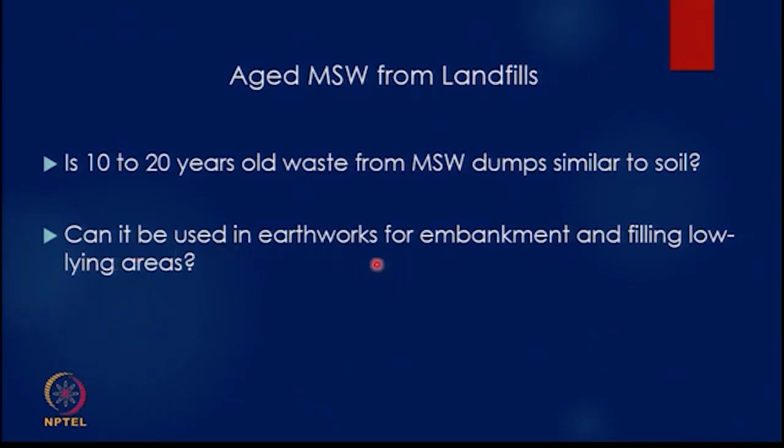So let's look at aged municipal solid waste. The question is: is 10 to 20 year old waste from MSW dumps similar to soil? Can it be used for earthworks in embankments, filling low-lying areas, and as backfill?

So does aged municipal solid waste have significant non-inert material? The material we should have should be physically and chemically stable. So is the organic content high? If it is high, we have a problem. The question is, what is high? Is 1% high, is 10% high, or is 50% high?

Does it have bad smell? Does it give out colored water? Does it leach out colored water? And does it leach out heavy metals or any other deleterious materials like sulfates, chlorides, and other salts?

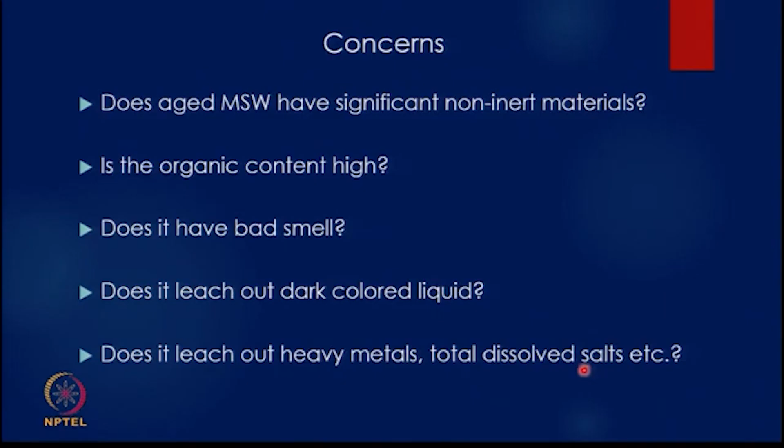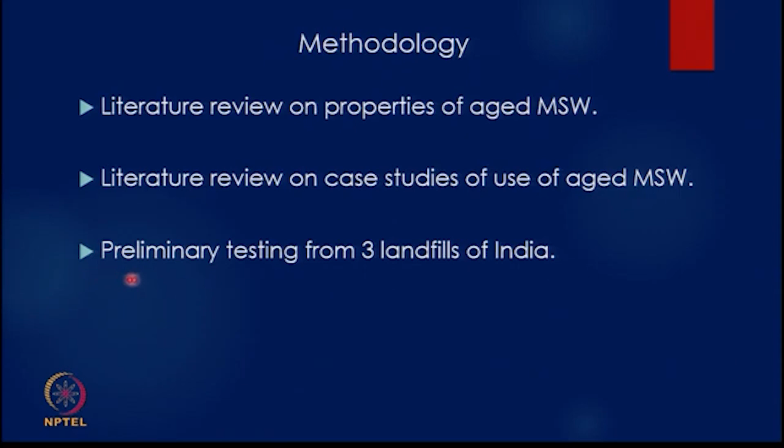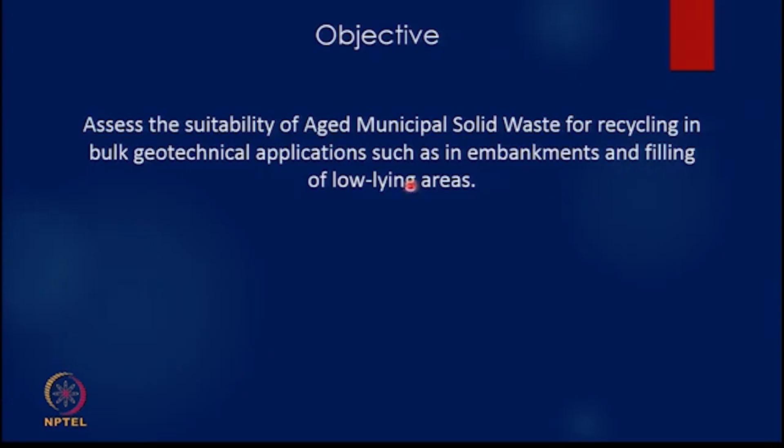So the methodology is we look at the literature, look at the case studies of use of aged municipal solid waste, and also look at the data emerging from India. The objective is to see whether bulk geotechnical applications of aged municipal solid waste in embankments and filling of low-lying areas is feasible.

If you look at the literature, I am talking about some data from California, some from Korea, and three from India. Typically the age of the waste: 60 years, 25 years, 4 to 12 years, 15 years, 15 years. Bulk of it, the waste is soil sized, please understand.

So passing 2mm sieve, about 40%, passing 2mm sieve, about 60 to 70%. Passing 8mm sieve, 60 to 70%. So gravel downwards or coarse sand downwards, 60% of the material, not reported. Passing 75 micron sieve is about 30%. So it means the others are more.

Here some liquid limit and plastic limit has been reported by California, but not reported in the others. Maximum dry density, good high range, indicating more soil-like behavior, a little lower range. OMC shows wide variations. So the question is, how much biodegradable content?

60 years: 6 to 12. 6 to 12, 14, 9 to 20, 9 to 16. So what was 35 to 75 has come to about 10%. That's all I can say. Maybe 15, sometimes as low as 5%.

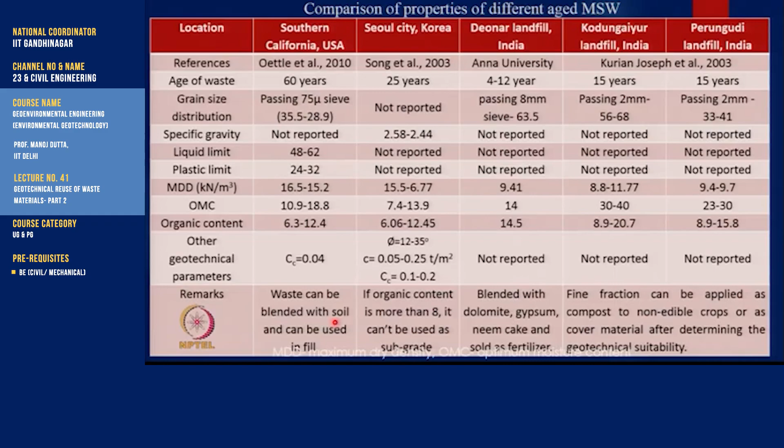You mix soil with 6% organic content, 100 grams, and take another 100 grams of soil with 0% organic content, mix the two, and the organic content will fall to 3%, and you can say I can use this soil. So that's what they suggested. And they were very clear that if you are having organic content more than 8%, the soil behaves very badly. And of course, this is for other materials.

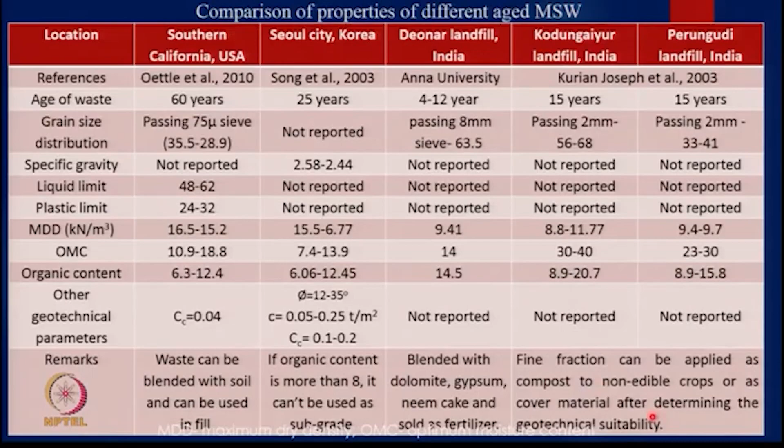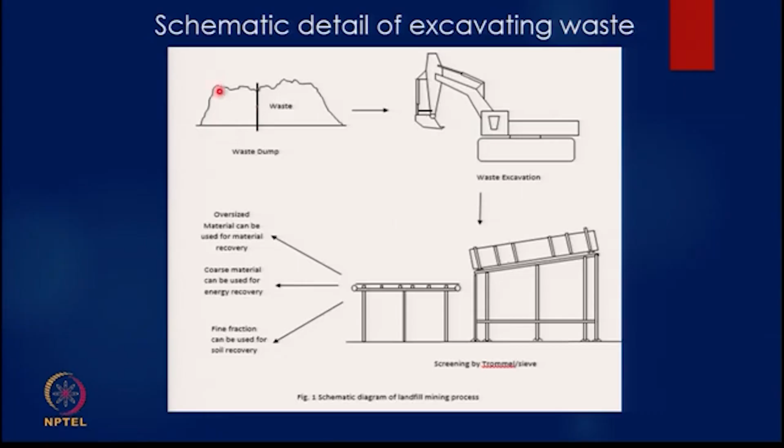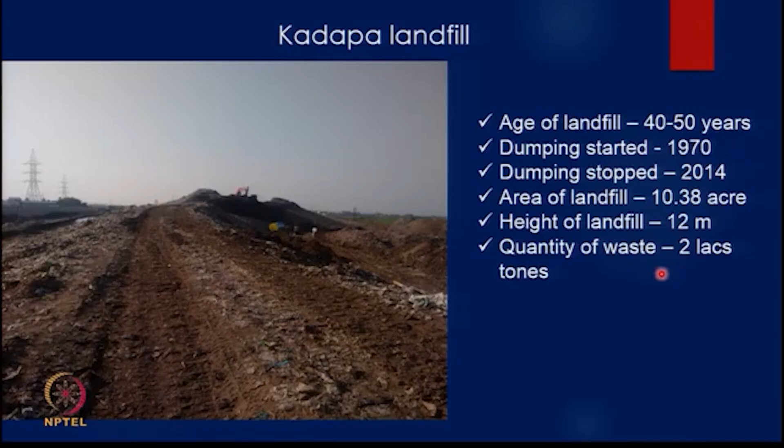Some of the work done by our students here, including Mohit and Garima, is happening in India. They've taken material from Kadapa landfill in Andhra Pradesh, waste as old as 40 to 50 years, the oldest waste, which operated from 1970 to 2014. From Hyderabad landfill, started in 2001, so 15 to 17 years old. Remember, 15 to 17 year old waste will be at the dead center.

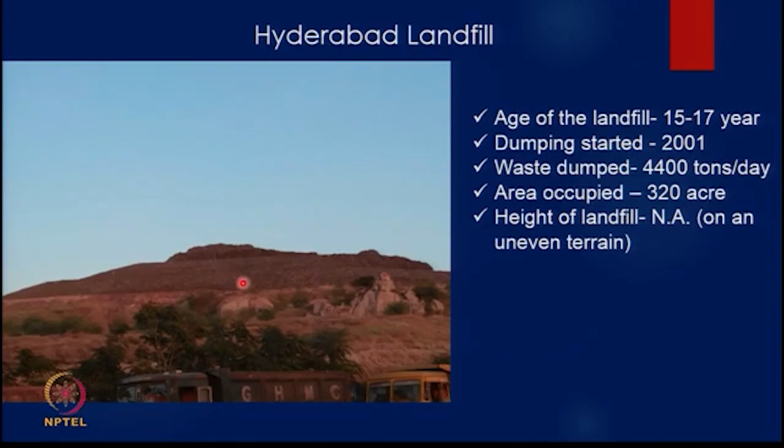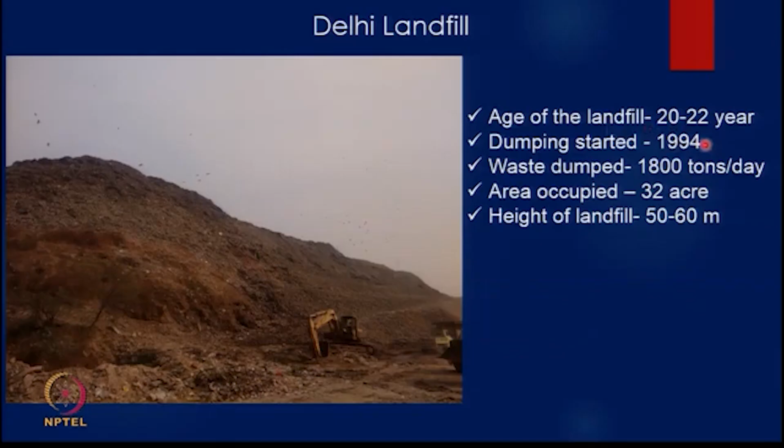Getting to that waste and taking it out is not that simple. The landfill keeps on growing, so the oldest waste is in the center. Then there's a Delhi landfill, started in 1994, with age about 20 to 22 years.

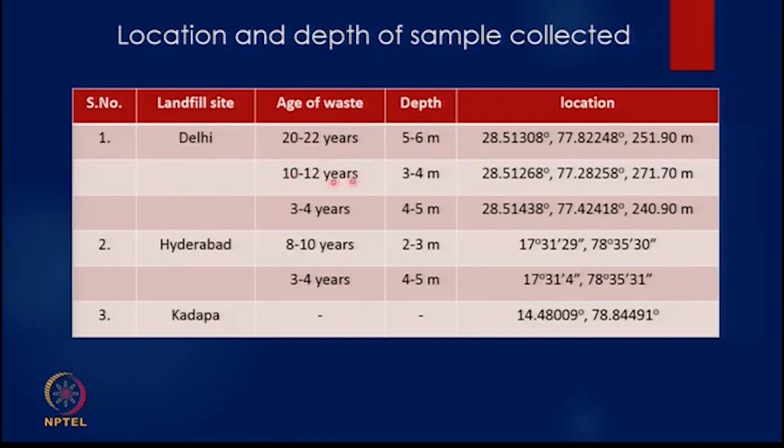So here's the kind of activity one does. Kadapa is a good site because it's a World Bank headed project doing landfill mining. Since they dug up everything and mined it, you weren't sure exactly what the age of the waste was because everything is now mixed. But in Hyderabad and Delhi, one could get samples 8 to 10 years old and 20 to 22 years old. So here's the Kadapa operation.

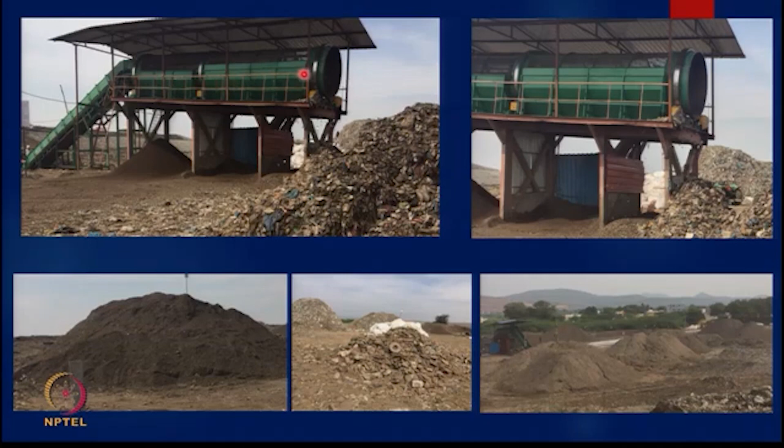Once it goes up the screen, these are the rotating screens, and this is the material that will fall out. This looks like soil, right? Some will fall out here, some will fall out here, and some will come out completely - that's the oversize fraction. You can see the oversize fraction falling here. This is soil, this is more sand and gravel-like, and this is the oversize fraction - plastics, cloth, and so on. So that's the soil-like material, that's the oversize fraction, and that's the landfill mining operation.

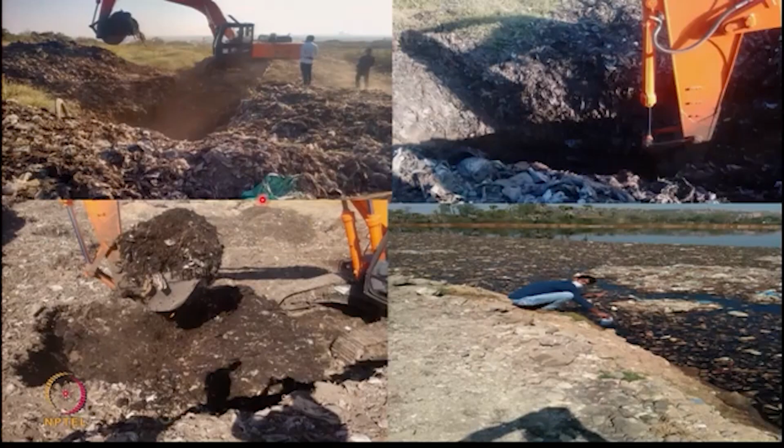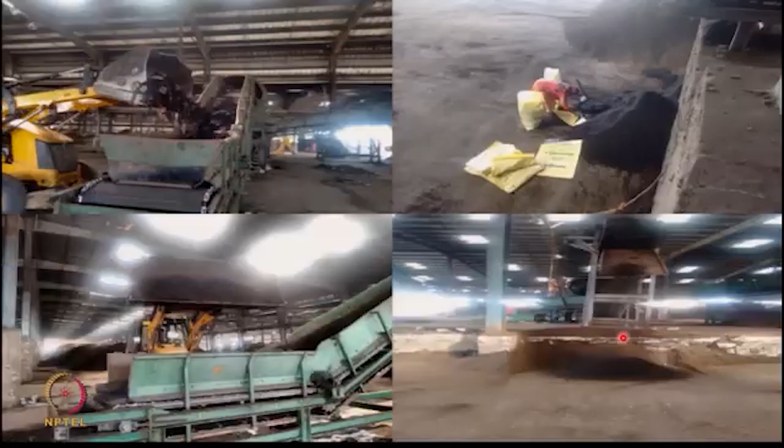This is what was done at Hyderabad. Here you can see a young man digging out the old waste. This is what it looks like, taking leachate samples, then coming into the trommel. This is the excavator bringing it, dumping it. That's the type of soil - in one location you get dark soil, in another case fresh brown soil.

So which has got more organic content - the light colored soil or the darker soil? The darker soil. Good. And this is at Delhi landfill, excavator being used.

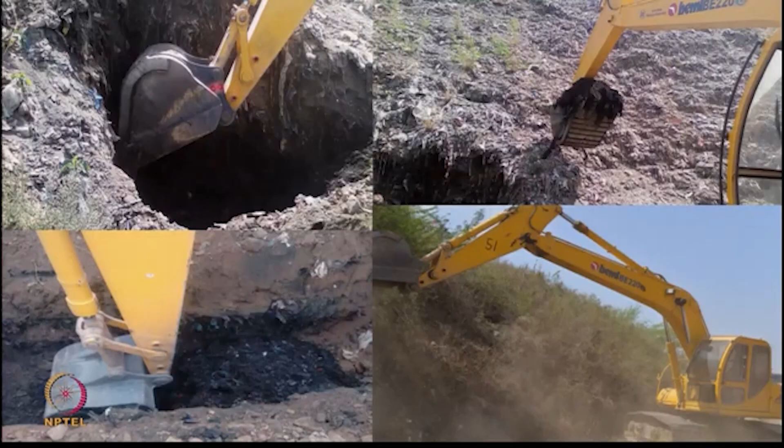You can see this dark material, this is another material. Here there were no trommels, so these sieves have been made specially. Soil is put on it, and this is something, and this is something.

Mohit was able to retrace the dates from newspaper cuttings still found in the waste, and he could prove that this was from 1998 - so that's almost 20 years ago.

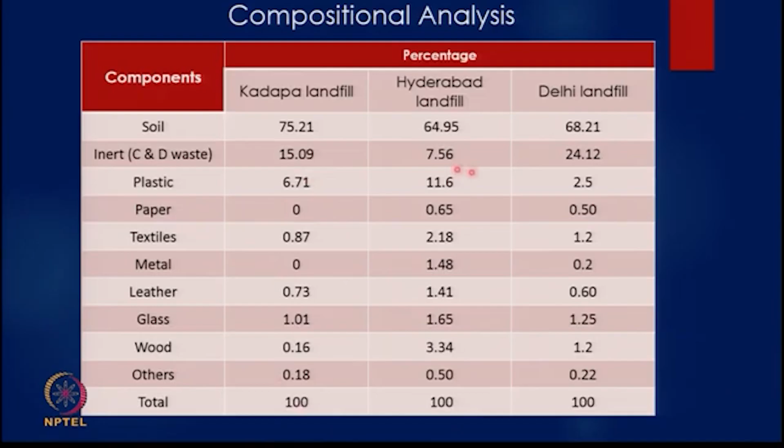When you look at the material in terms of its compositional individual components, most of the material is soil-size range. This is the oversized range - the large construction material, which when you say inert, you mean large sized material. But you have plastics here in Kadapa, and there are others - a little bit of textiles, cloth rags, leather, wood - all these are burnable. These are energy recovery materials, please remember.

When I do grain size distribution, I am interested in how much is soil-like material. Soil-like means gravel, sand, silt, clay. Sand range is less than 4.75 mm and gravel is 4.75 to 20 mm, probably fine gravel, but there is also coarse gravel. So the material which is less than 4 is 20%, 20%, 16%. The material which is 8 to 4, if you go up to 30, then it's 33 plus 12 plus 22. So about 60% material is soil-like.

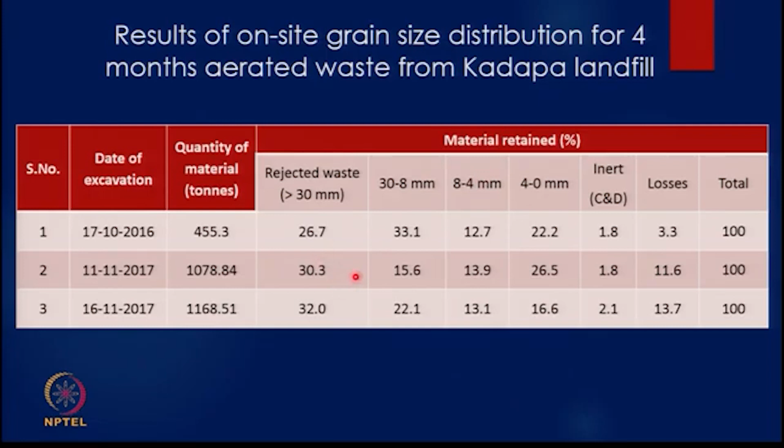This is from Kadapa, 60% material is soil-like. From Delhi also, if I go 35 down, 14, 35 to 16, 16 to 4, 4 to 0 - 14 plus 20, 34 plus 33, 67, 10, 30, 70. So 60 to 70% material is in the soil sized range.

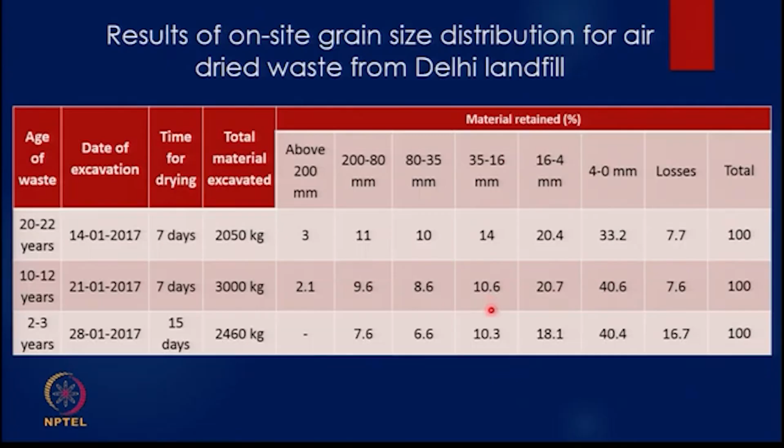Then let's look at organic content, because that's something which is important to us. From 20-year-old Delhi landfill, 12-year-old Delhi landfill, we are having 6 to 10%. But this is only the very fine range, please see. The wood fragments and other material will not go in. The moment you go to a higher range, it goes up. Hyderabad landfill is 11 to 12% in the very fine range, but if you go to the higher range, 20%. Kadapa landfill is 6 to 7%.

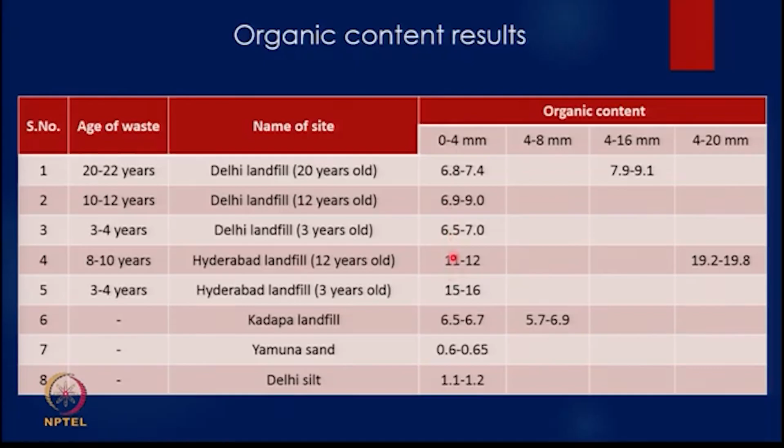But if I take Yamuna sand, 0.6, if I take Delhi silt, 1. They are less than 3%, and these are all above 3%. And still the full test has to be done, because this matrix has only been done on this size. When you fill these up, maybe the values will go up, because this is only 20% of the material. If you are only going to take out 20% of the material, you are not going to be able to use much of the material.

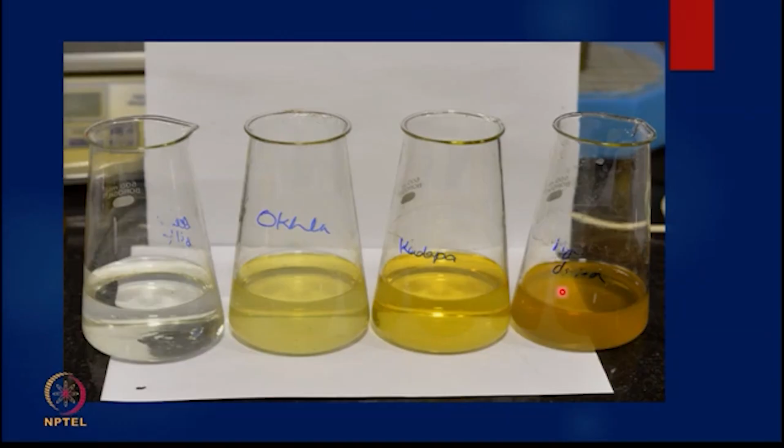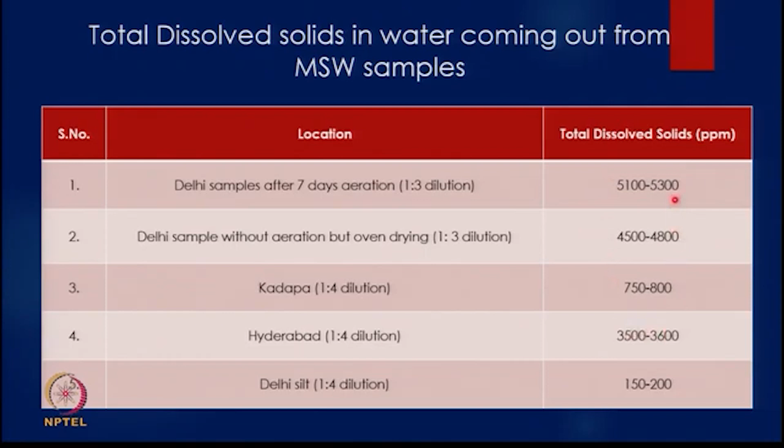But when you mix water with them, because you saw black leachate at the site, you said let's mix water with the soil, so we get these kind of suspensions. And when you decant it through filter paper - this is silt, this is Delhi, this is Kadapa, this is Hyderabad - so there is some color which is coming out. The leachate that you analyze, they don't have very high heavy metals, maybe 1 or 2 exceeding the limits, but there are a lot of total dissolved salts. So we just mixed 1:3 dilution or 1:4 dilution. This is just initial work, and we are getting very high values of total dissolved solids. Please see, Delhi silt is 150 to 200. In drinking water, 500 is acceptable, desirable, but here these are all in thousands. So that's a problem.

And does it smell bad? When you excavate, it smells very bad. But within a month, there is very little odor. After aeration for a month, it's like soil, you feel it's like soil. High odor when you excavate it.

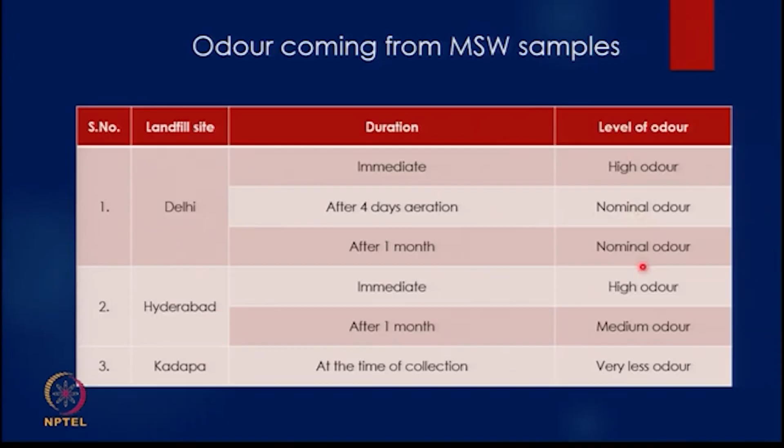And if you look at the permissible organic contents in the various literature, up to 5% is allowed. Maybe sometimes 7% is also mentioned, but 5% is allowed.

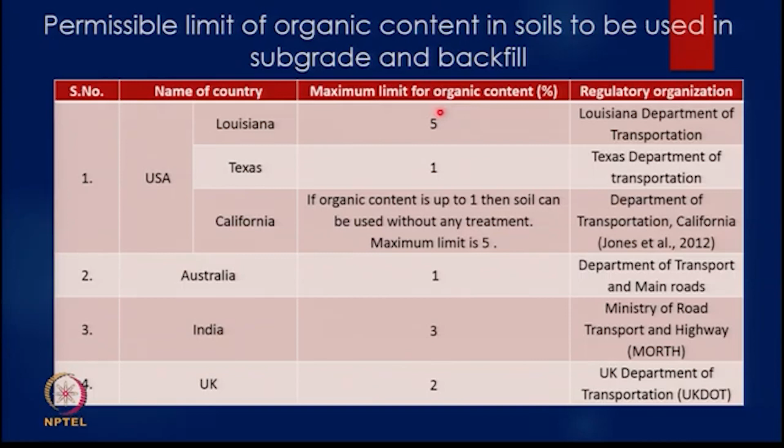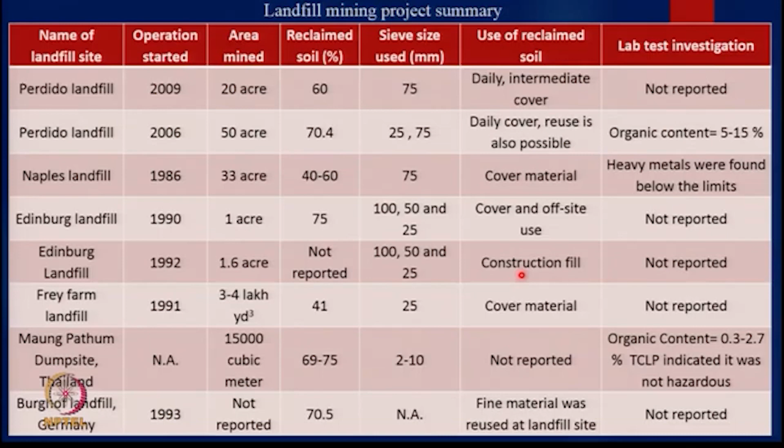Then you look at case studies of all these landfill mining projects, how much of the soil has been used as an earth fill - this is all these landfills abroad. You are using about 60 to 70% soil, but all of them are reusing it at the landfill as intermediate cover, daily cover, intermediate cover, daily cover, cover. Nobody is using it as an earth fill, except one place it is written, but the details are not mentioned. So even today, because of the organic content and associated salts, there is a slight thinking that it cannot be used. But one thing is clear, maybe it requires some pre-treatment. And if I can find a cost-effective way of pre-treatment, then I can use it in the earthworks.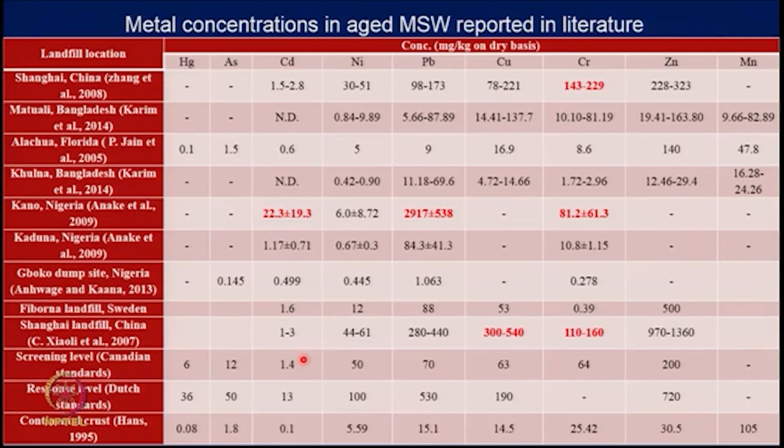If you look at this table where we have determined all these heavy metals, we find that in bulk of the landfills chromium is high. In some of the landfills copper is at an elevated level, and in one of the landfills cadmium is at an elevated level.

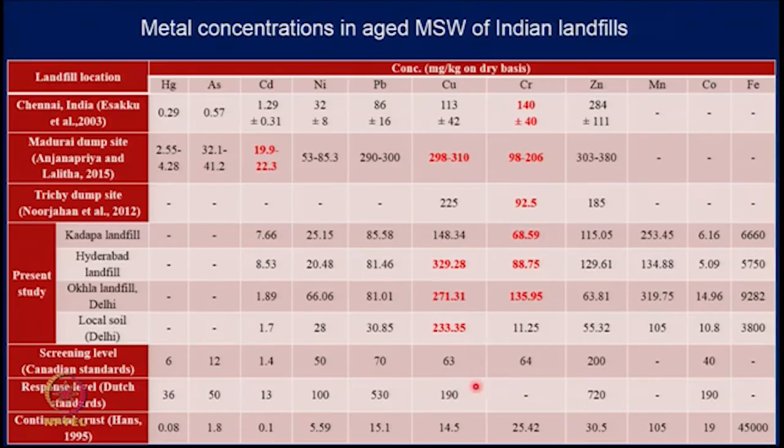So the issue is that in aged municipal solid waste, sometimes the heavy metals can be higher.

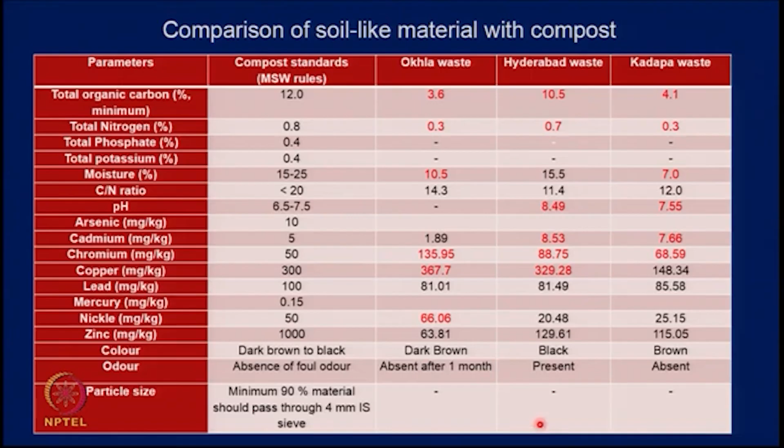So in this way, what we see is that in some landfills the heavy metals may be within limits, but in other landfills heavy metals may be at an elevated level.

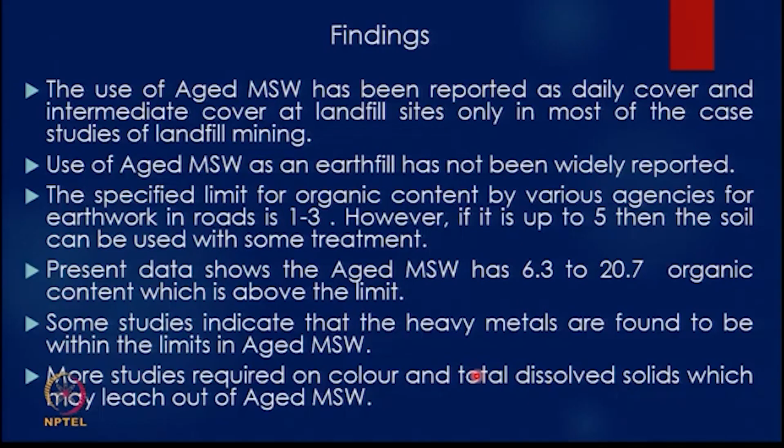But I do expect over the next 5 years that technologies will now be there where we can start reusing it. We do some aeration, we do some burning, we do some pre-treatment to make it workable.

Any thoughts on your mind before we go forward? Because the next one is incinerated ash.

So as far as aged municipal solid waste is concerned, one thing that does come out is it degrades very rapidly. In 10 years that 35-40% is down to 10-12%. And whether that limit of 5 can be taken to 10, the jury is still out.

But remember that if you want to use more and more of the waste, you have to take the higher fractions. So as you go to coarser fractions, the organic content seems to be going up. So if you want to use 70%, then you have to use 30 mm down.

And the test for doing organic content is a muffle furnace test, where the crucible in which you put the sample is very small. So if you want to take a lot of soil, then you have to have a big muffle furnace which is required for a representative organic content.

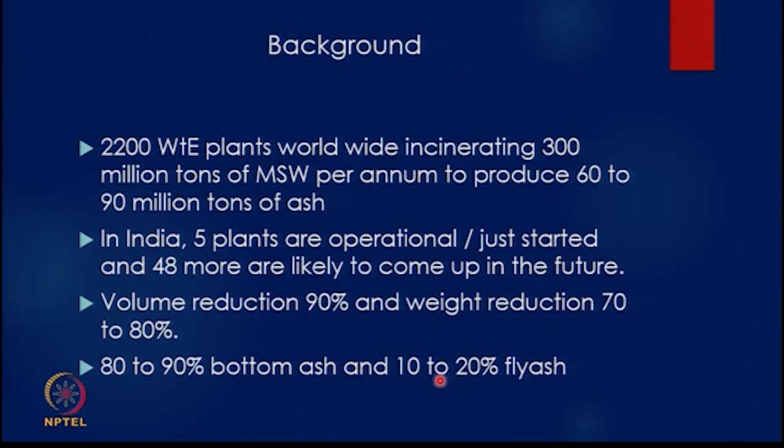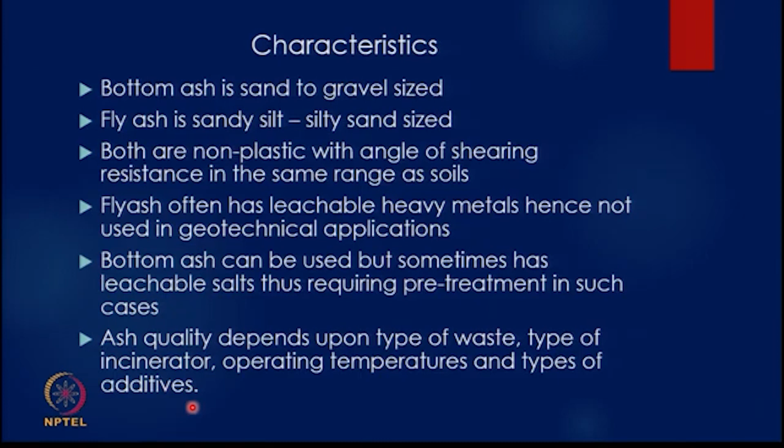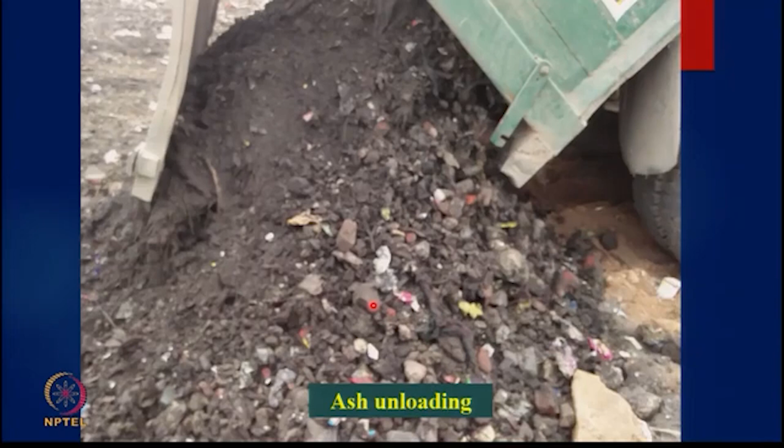So if you look at what's happening in Delhi, ash is coming in the form of trucks. We are not sure whether it is mixed or unmixed, but no separate truck comes for fly ash and bottom ash, so maybe it's mixed. Maybe 8 trucks will be of bottom ash and 2 will be of fly ash. The ash doesn't look like coal ash, it's dark, not like the light grey fly ash that you saw, and you can see large sized particles because it's a mass burn plant.

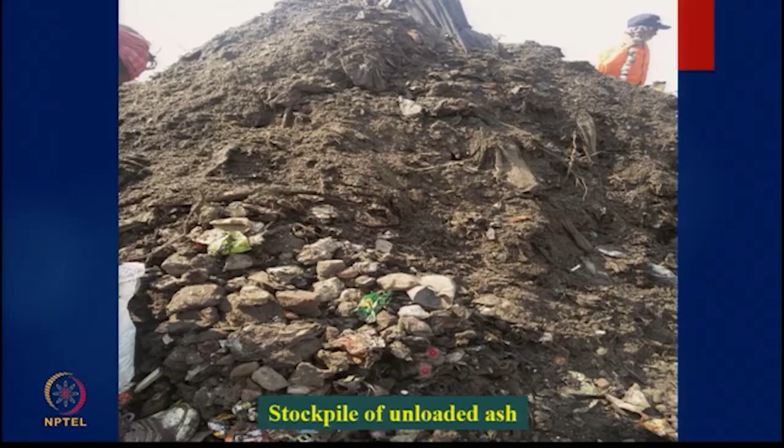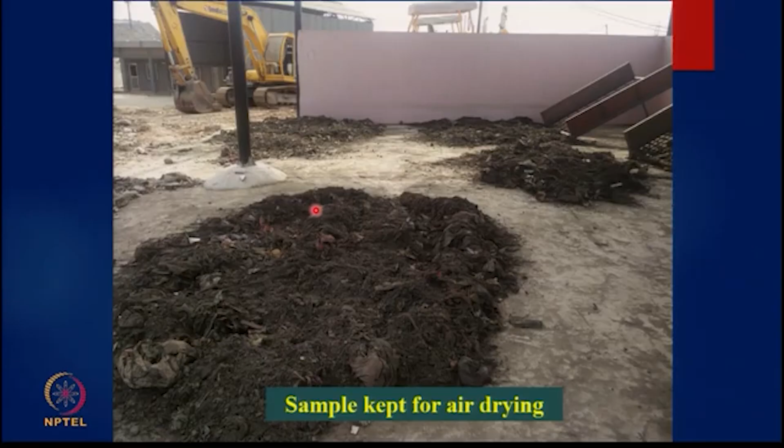And when you stockpile it, this one truckload, you can see some of the large sized stones. You could sample it using a loader, and this is the material which has reached the sieving station, and this is after drying. Now you can use sieves of different sizes. These are sieving operations going on.

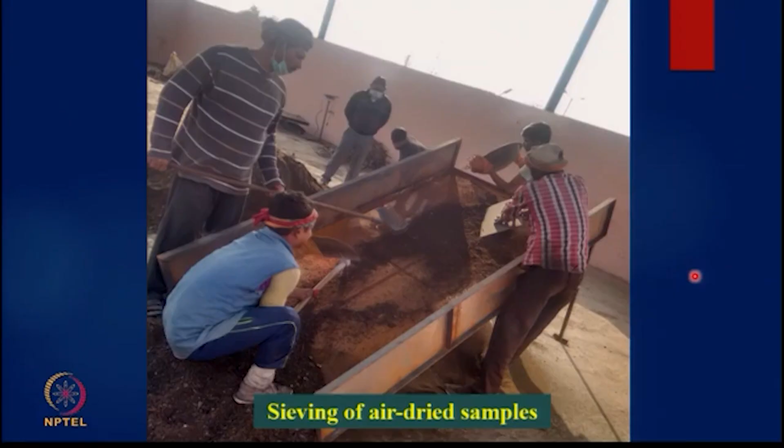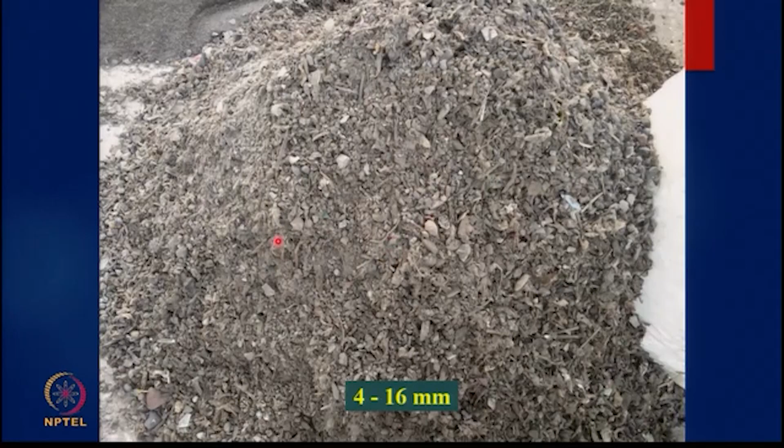So that is less than 4 mm, looks like soil, sandy material, comfortable, greyish, Yamuna sand like. That's 4 to 16 mm, but you see some non-soil like material.

So everything doesn't seem to have burnt, right? We would expect at 900 this would have burnt. But anyway, still it's gravelly material, what we expected. That's 16 to 35, so mostly gravelly material, C&D waste, aggregate, some ceramics, some glass. So this should have burnt.

And that's 35 to 80, cloth, you can see, a lot of cloth. Okay, and of course large size material. And not to miss this, greater than 80 mm, 8 centimeters, 3 inches, the size of your triaxial sample, that's the sieve size. A lot of cloth and plastics, but some bricks and other materials as well.

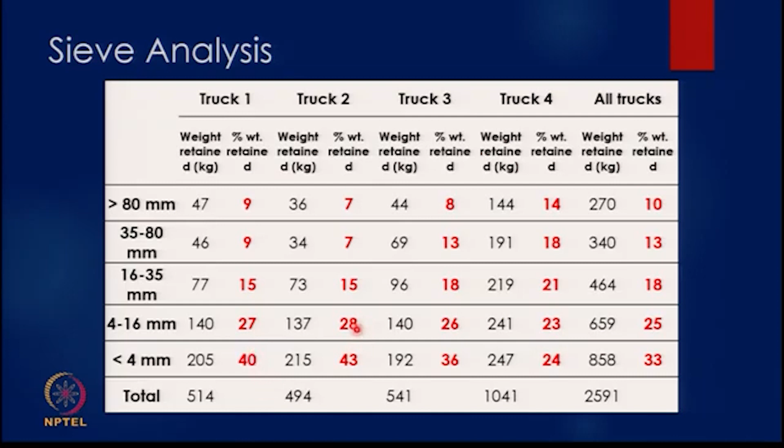So if you look at the grain size distribution, 90% in the gravel to sand silt size range, 93%, 92%, 86%.

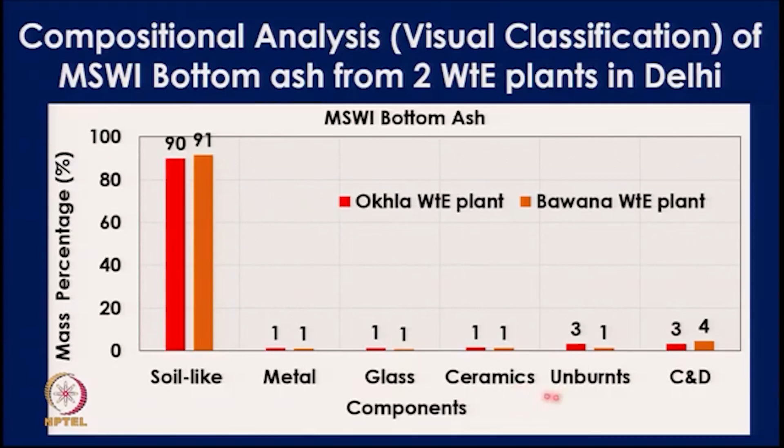If you look at the compositional analysis of the incinerator bottom ash from 2 waste to energy plants in Delhi, we see that the soil-like material is 90% of the total, and the other minor components are metal, glass, ceramics, some unburnt organics, and C&D waste.

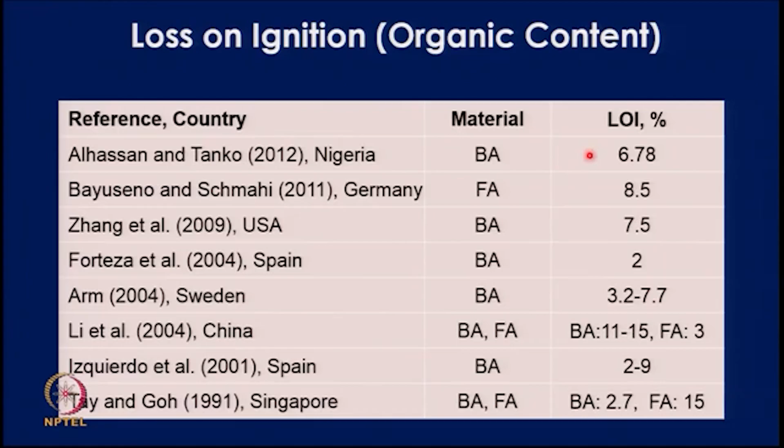If you look at the data reported in literature on loss on ignition in the muffle furnace, then in the incinerated ash, the LOI can be as low as 2%, but it can be as high as 15%. That means all the organics are not completely burnt in the incineration process.

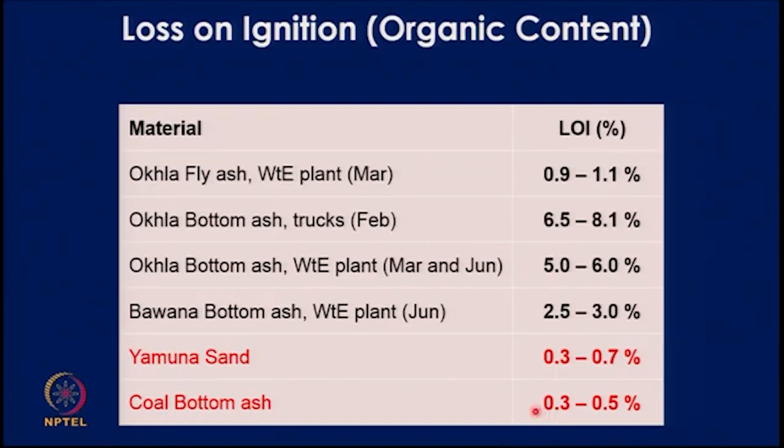The other issue regarding incinerated ash is the presence of heavy metals and soluble salts. So if you look at data emanating from different countries, fly ash has more abundance of heavy metals, and lead, zinc, cadmium, chromium have been the metals of concern.

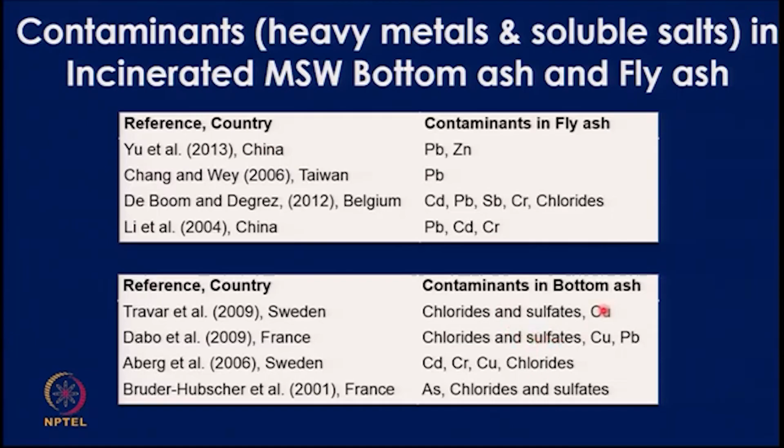Whereas in bottom ash, it's more the salts. So there has been reporting of a high amount of chlorides and sulfates in many bottom ash samples, and heavy metals have not always been reported to be of very high values, but we do see copper coming up again and again.

If we look at the total dissolved solids data just emanating from the bottom ash of the 2 waste-to-energy plants in Delhi, we find that the values are extremely high in comparison to the local Yamuna sand and the local bottom ash of a coal-fired thermal power station.

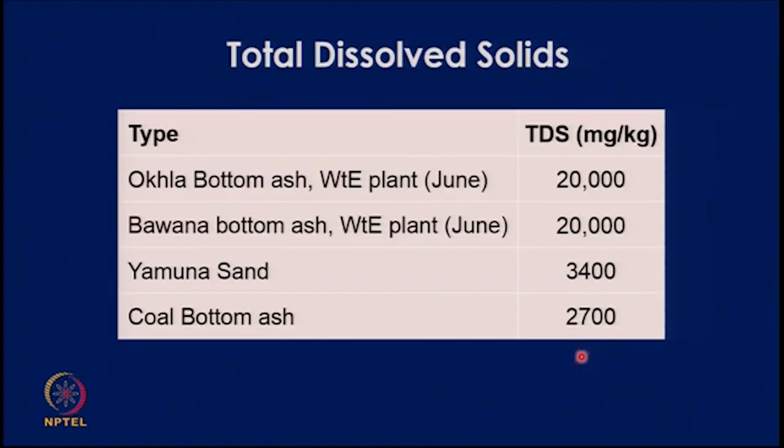If one looks at case studies for reutilization of incinerated bottom ash, we find that often it has been used for production of secondary aggregates or as part of the base course in road construction.

2 examples of embankment construction in Netherlands reported in the 80s talk about large utilization of bottom ash, but it's important to note that wherever bottom ash was used, a compacted clay liner was put over it and also a sand drainage layer in an attempt to keep the water out of the bottom ash which had been placed in the embankment, and groundwater quality was measured intensively on both sides of the embankment.

And so is the case in the second example, where a sand bentonite mixture was used on top to minimize the infiltration of the rainwater reaching the bottom ash. In other examples, bottom ash has been used within the landfill for construction of access roads, and also as a 30% substitute in aggregate for the asphalt access road in the US.

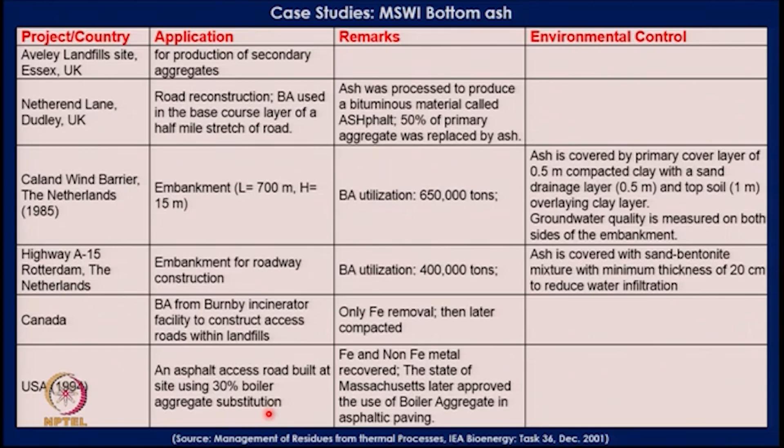So these are some examples of how MSW bottom ash after incineration has been used in different applications in roads and embankments. Well, that's all the testing that's been done so far. Data emanating from the world is that bottom ash in many cases can be utilized in geotechnical applications.

So this is a front running area because you have 30% of the material which has to be taken care of. Landfills may become 1/3 their size, but they are not going to vanish.

So that's the information about geotechnical reuse of incinerated ash and aged municipal solid waste. I hope one of you will work in this area in the future to help solve this, so that all the lovely mountains of waste we have disappear. I'll be happy to answer any questions, or hear any alternate thoughts on what we should do with all this.

Once you do the sieving and fractionation, it's clear the soil-like fraction is towards the finer size, and from the larger size material you can pick out the boulders. It can be treated like construction and demolition waste, and the balance can go into producing energy, meaning the cloths, plastics and paper can be sent back. But for that you have to do all this sieving again, and that costs money.